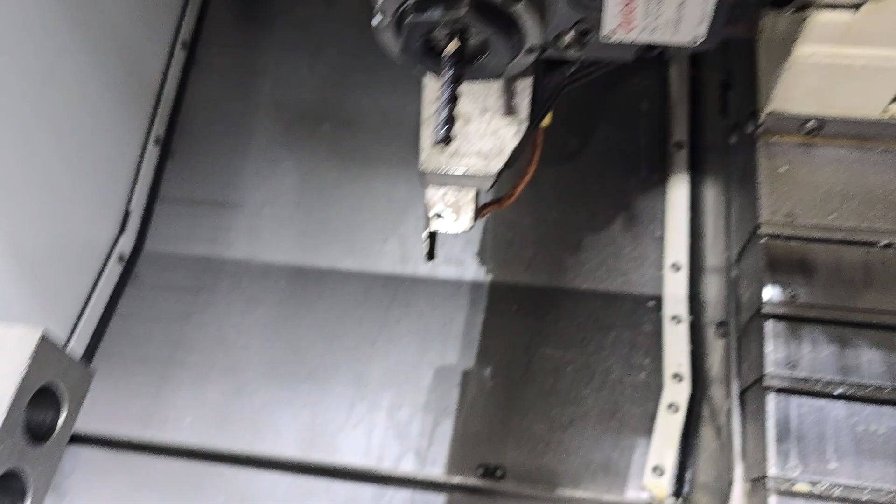You need a Y-axis for that, because what's going to happen is we're going to have that end mill go on a Y to the top, and I'll show you because I'm going to machine one part with you, and it's going to do like a radius line, and it's going to come up.

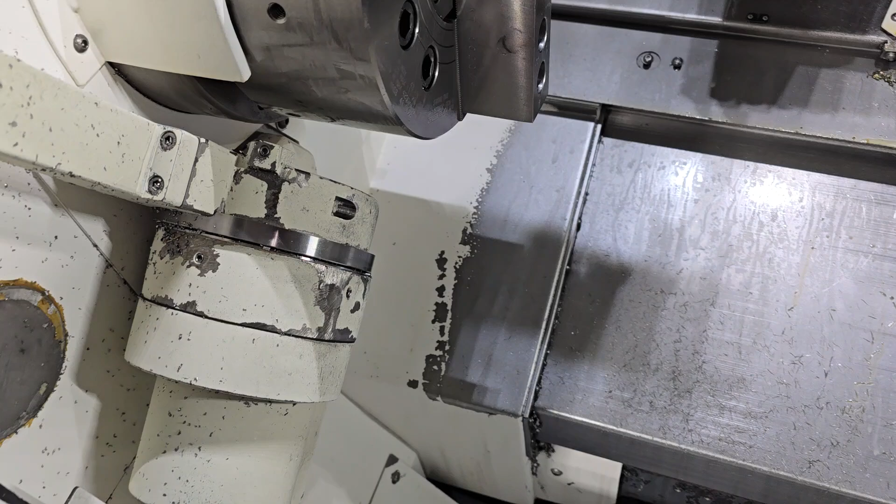So I did a test piece, and this is what we're doing. It's just very small flats with the radiuses at the end, as you see. Just to kind of show you what we need.

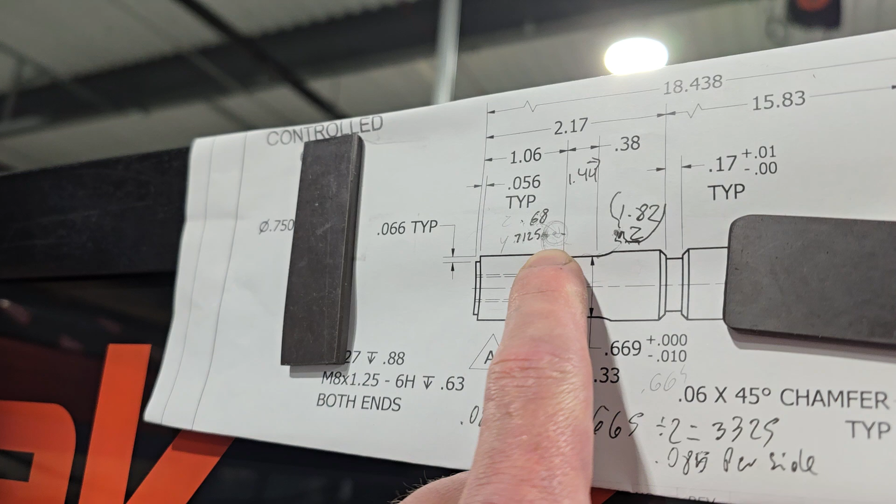So you need a starting point. What we have is, as you see, 1.06 here. The flat is 380. And then we know that these radiuses are 380. That's really all the information you need.

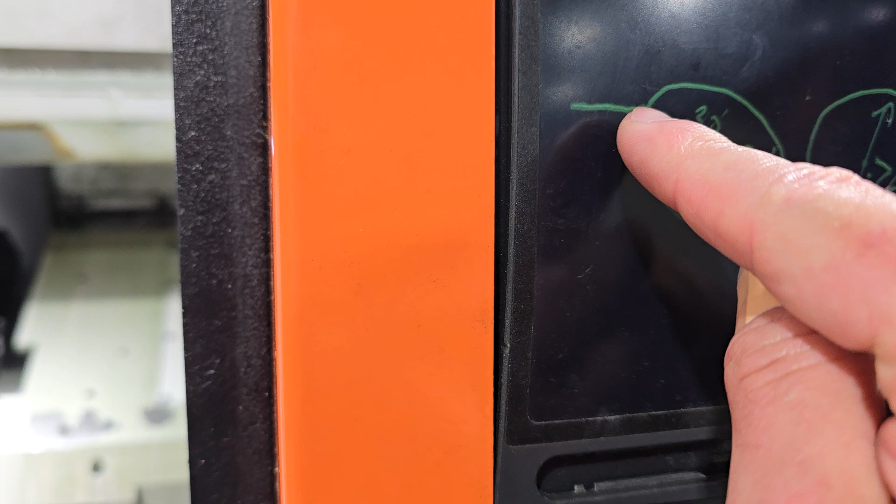The way you're going to machine it is you're going to start like do a radius, and listen, the material is actually here, so it's going to go up because I don't know this radius. I can calculate the full radius though.

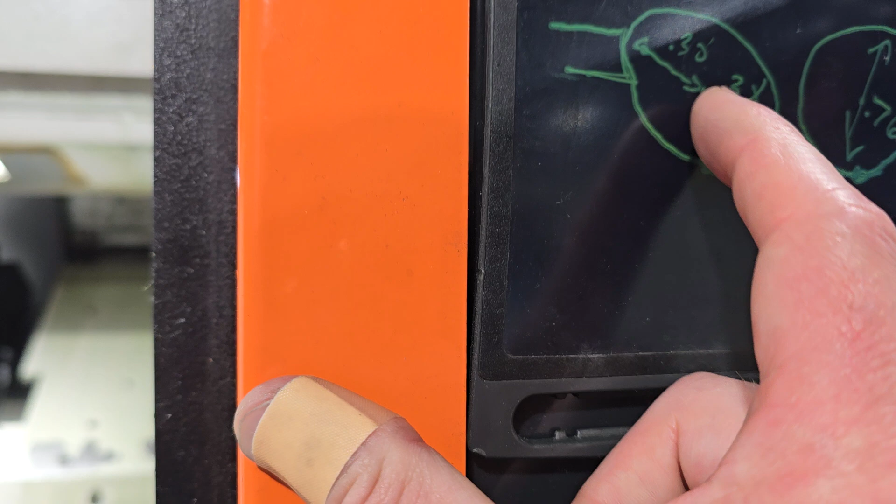Because all you got to do is go whatever the bottom is plus 380, because we know that radius is 380, and we can go from a center, but because we're only covering about half that radius, I don't know what's the starting Z point of that radius. So I'm going the full one, so it's just going to cut air before it cuts into the material.

So let me explain maybe here. As you see, I kind of drew a radius a little bit. So imagine this is a whole radius.

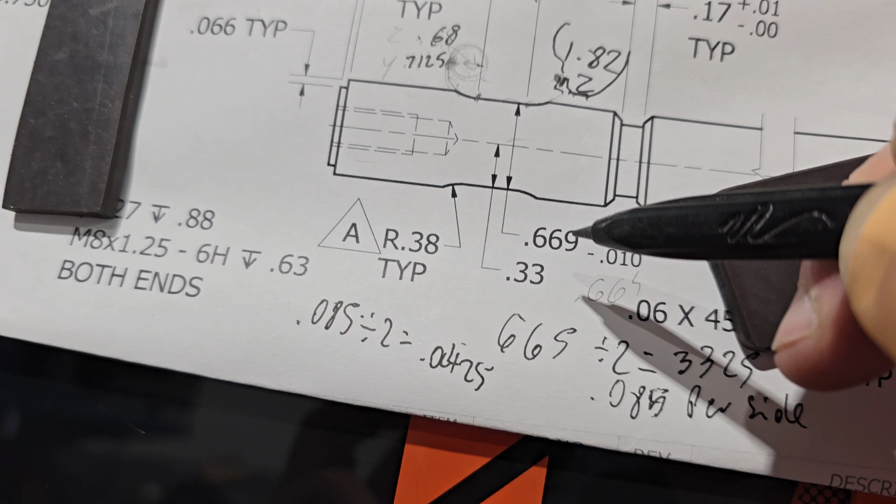I don't know what this is, but I know what that's going to be, because all you got to do is we have 669, so minus 10, so we do 665. 665 divided by 2 is 300... it's 0.3325. That's going to be from here to here.

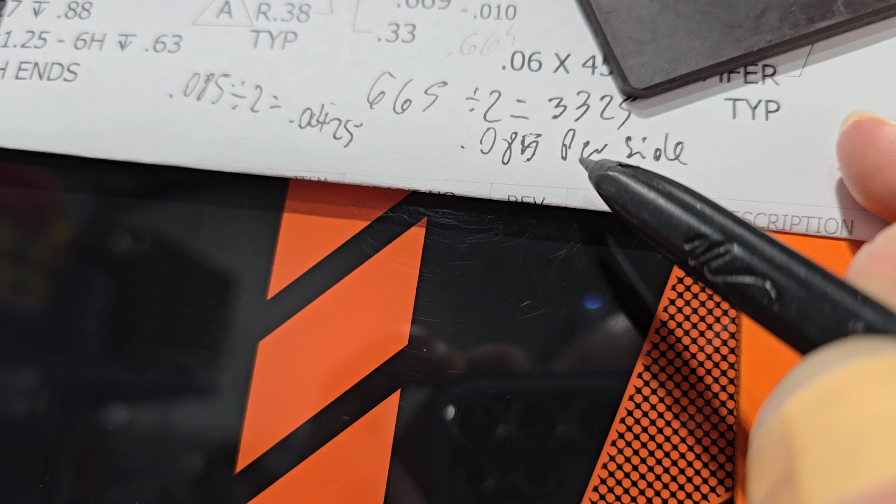Okay, and then we're moving 85 thou per side. Well, actually the whole thing, but you divide it by 2, so we're moving 42 and a half thou from here. So all you got to do, since the radius is 380, add 380 from here to here, and from here to here, and that's going to be the center of your radius.

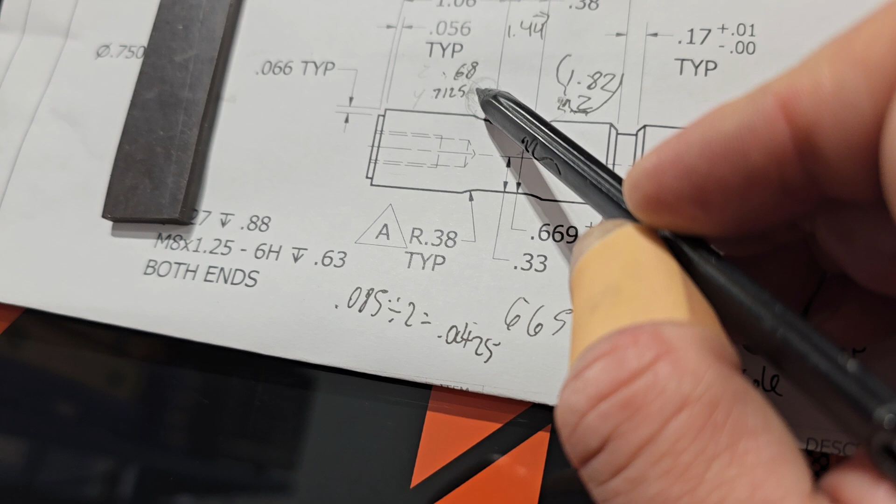Okay, so you literally go from the center, not the whole sphere, just the center. You go in here, here, then the line ends here. And then we're doing counterclockwise again over here.

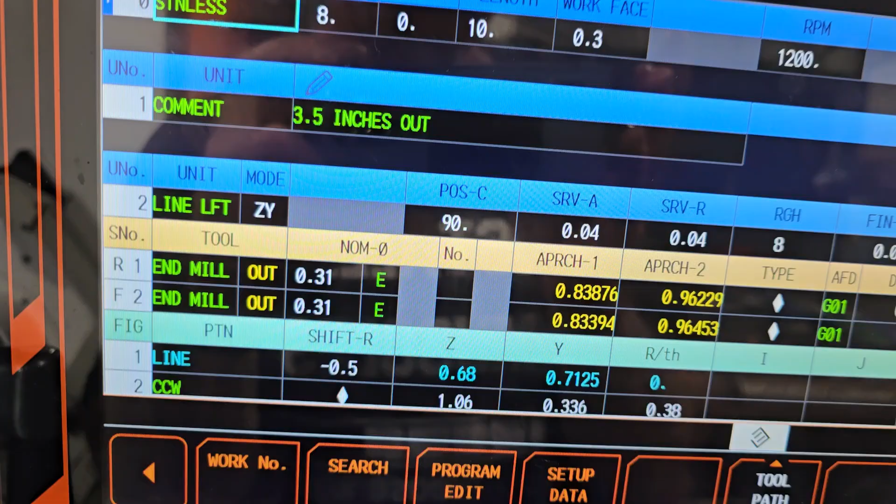Let me show you the program. So we're using line left, Z and Y. That means the machine is going to be cutting on a Z, and it's going up on a Y. You can go up on a Y, or you can go down on a Y. So we're doing Z and Y, position C.

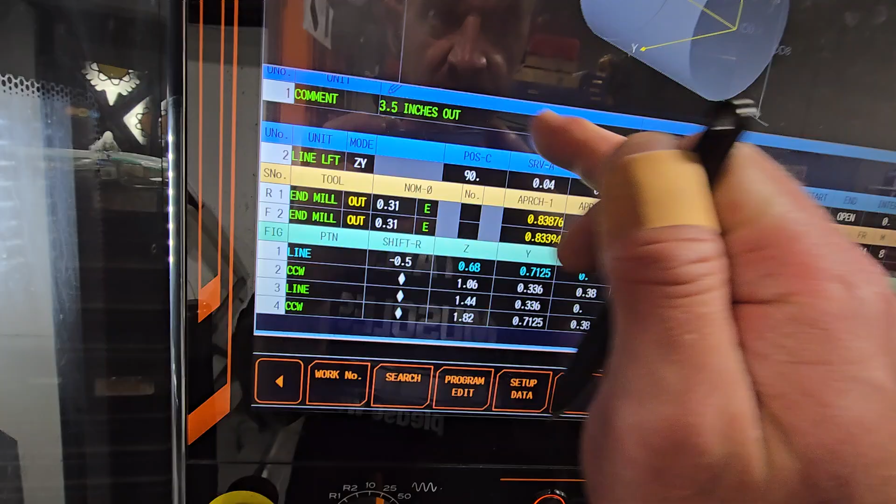The reason instead of 0 and 180, I have 90 and 270 is because if you do 0 and go to toolpath, the machine is going to show you this position. If you do 90, 270, it flips it, and you can see the bottom and the top, right?

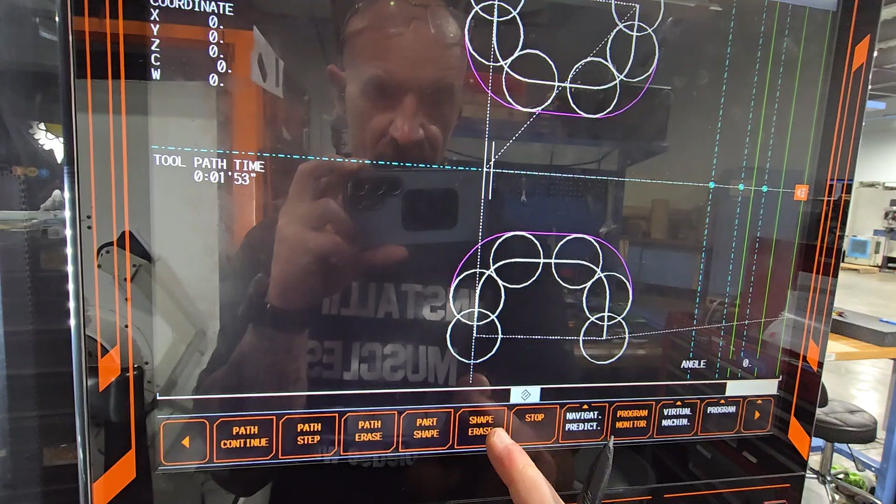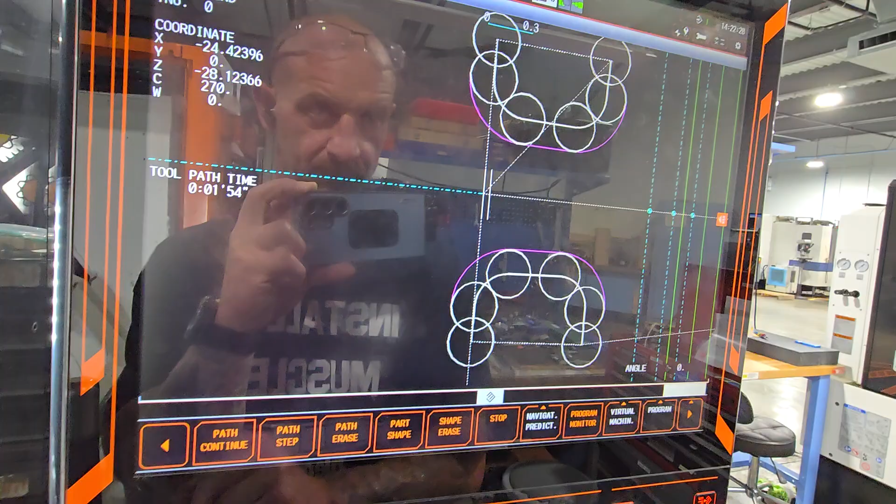So you do path erase, shape erase, you do part, and you'll see both of these. Then you can do the path continue, and you see the behavior of the machine. So that's why I changed this to 90, so I can see it better. Same thing as when you press this one.

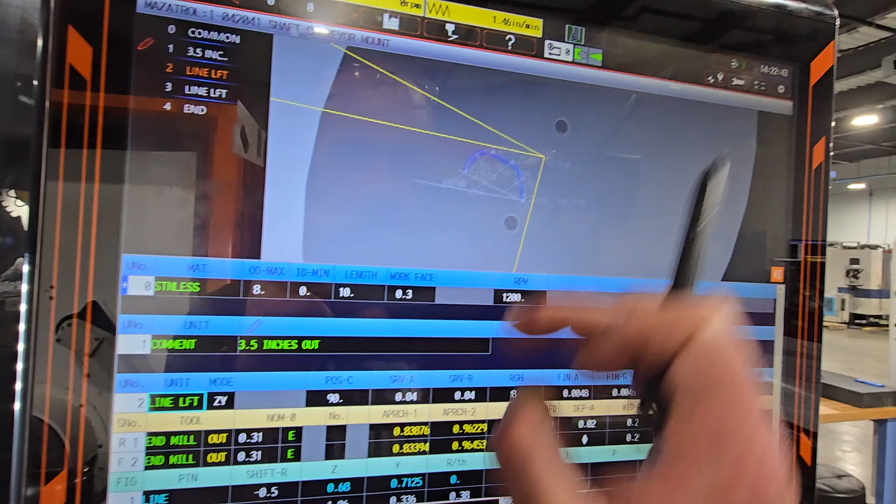Let me see if it's going to show you here. See, it shows you even on here the shape, so we know we have a correct shape. Anyway, so that's why I got the position 90 here.

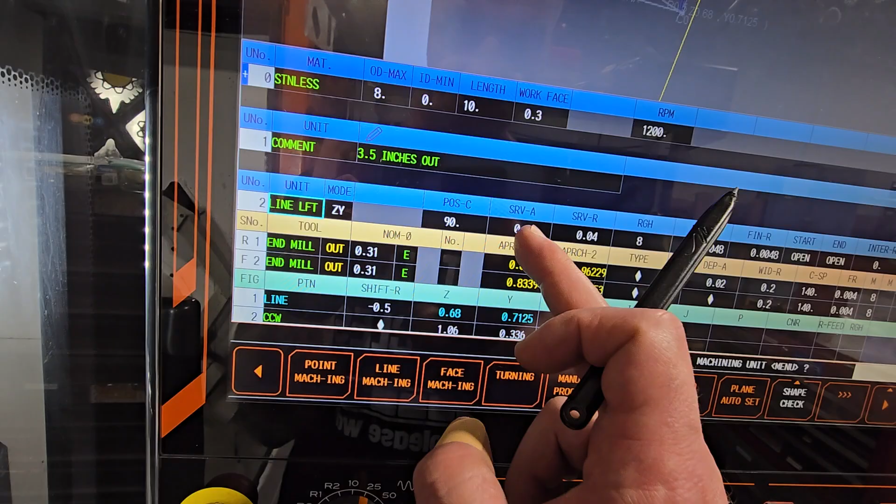We're moving 40 thou from A, so that's going to be the depth. This is going to be A, and R is going to be the depth over here.

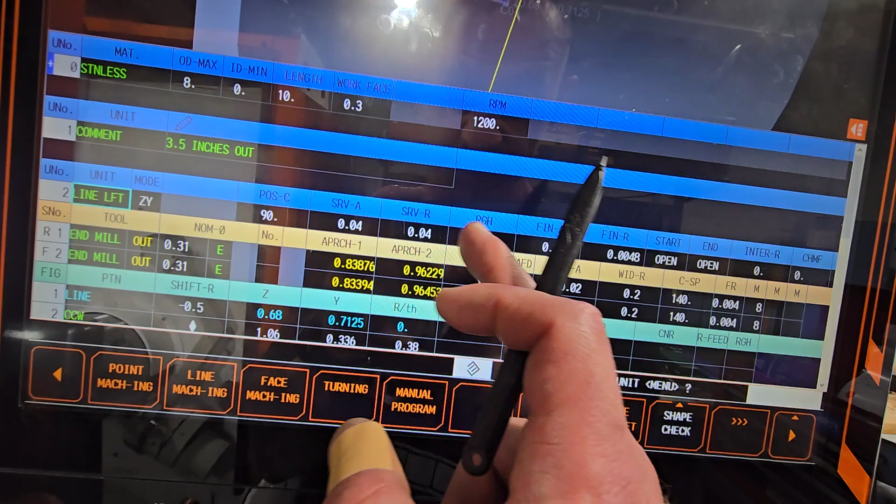My finishes are gonna be, I put a roughing as 8, so 0048, 0048, start and end open, inter-R and chamfer zeros. These are all automatically populated. I put 20 thou depth of cut. You can do way more, I was just playing with it. Width of the cut is 200, and I'm using a 312 end mill. So let's start.

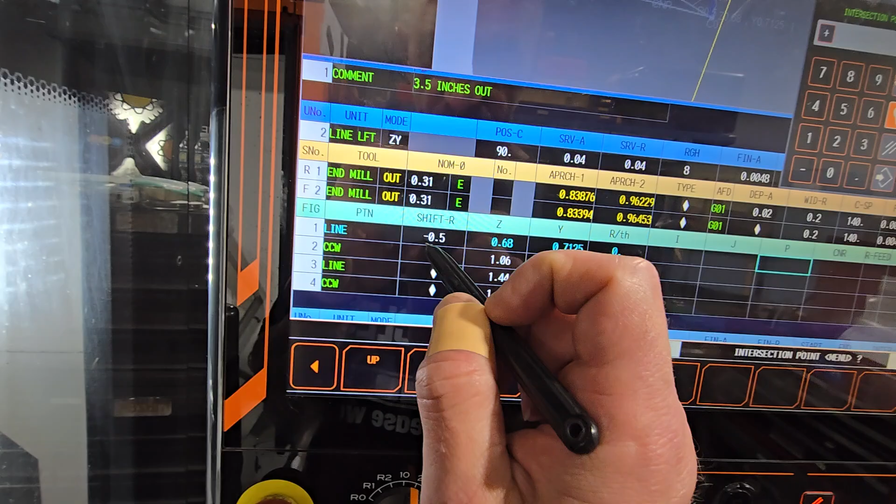So first, we have a line and 0.5 R. That's how deep it's gonna go. Okay, so...

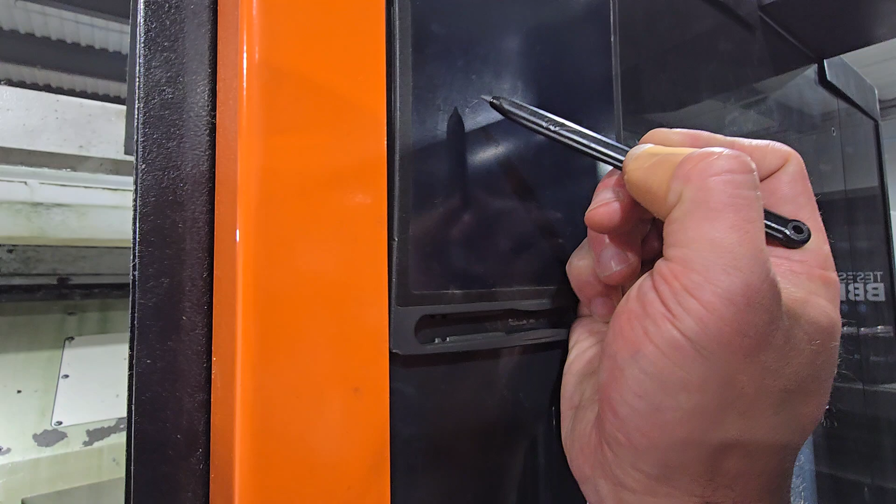Let's draw the part. All right, so this is the part, but we know these are the radiuses. So now just imagine we get rid of this because, right, this is not gonna draw.

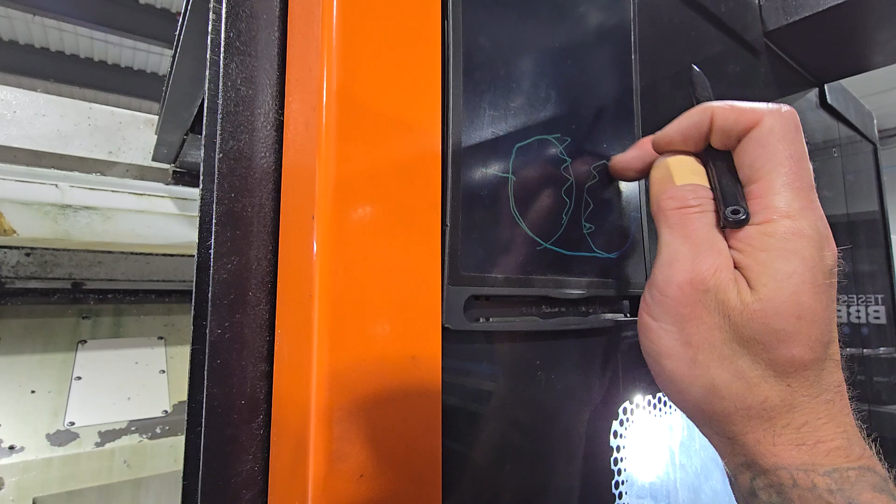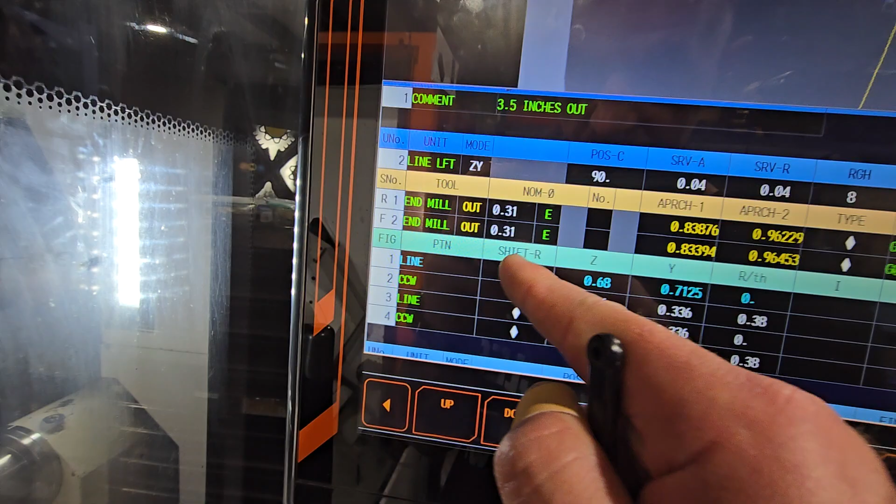So we are starting here. This is gonna be our line. And just so you remember, when you do your line, which is your first one, it's your starting point, the shift R means the tool is gonna go half an inch minus. So the R, 0, is the center of the part.

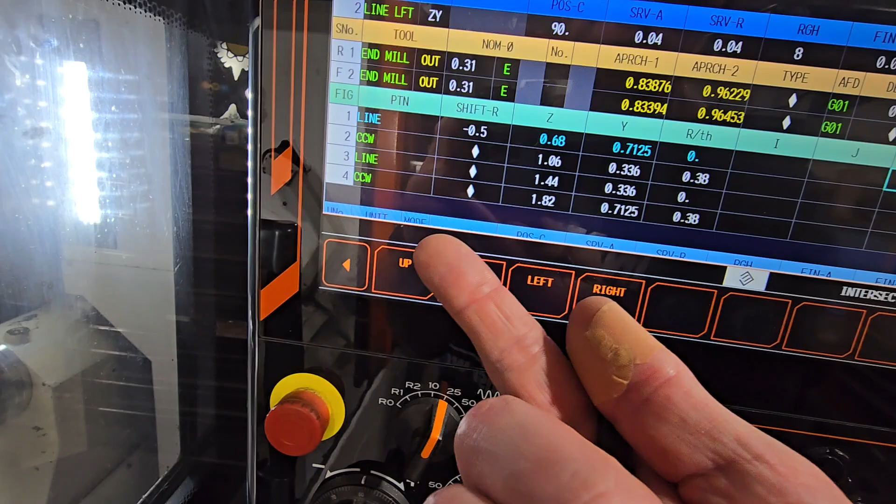I'm going another 500 deeper, right? So it passes the part. That's why, so R, in line left, X, Y and Z, or Z and Y, it's technically how deep you're gonna go, that's your R. So -.5 on R, that's like literally 1 inch deep. Since it's a 3/4 part, it's gonna go 250 thou past the part.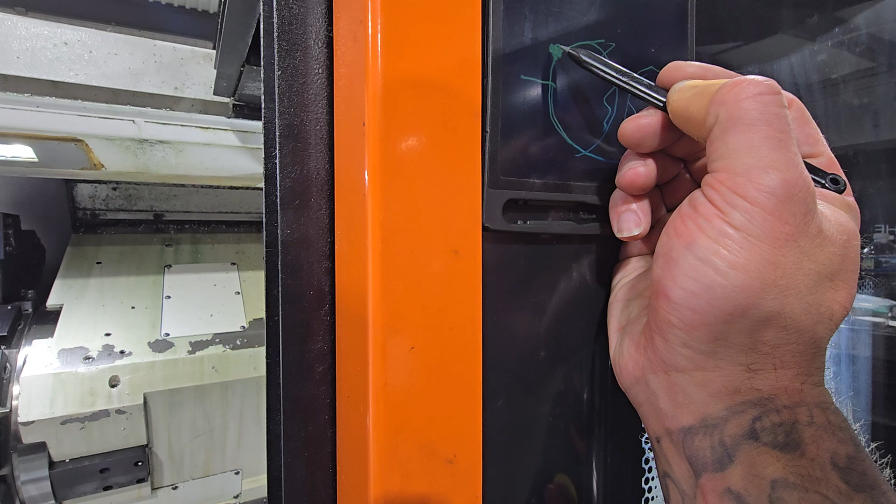Starting position is 0.680. So this is 0.680 on Z, and Y, since Y is gonna be our X, right? Because we're milling, it's gonna be 712.5. And how did I come out with this number? Because I added, like I said, half plus 380, and that's how I got the center of the height of this one.

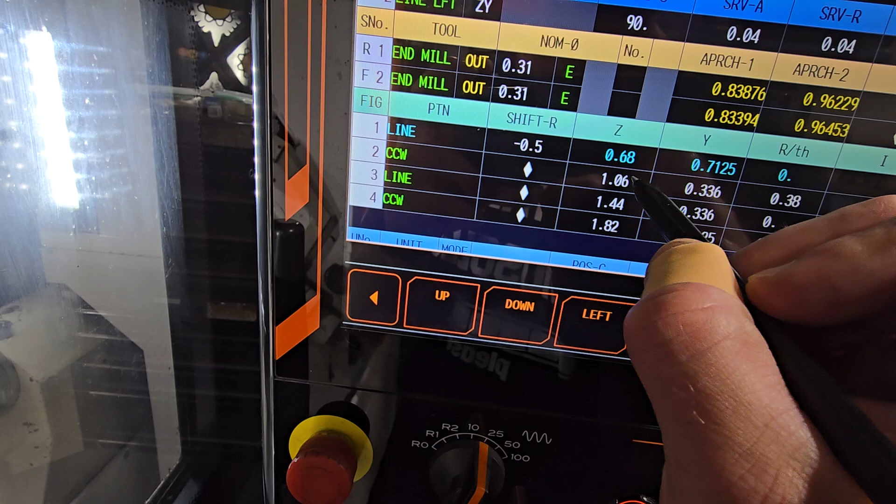So this is my line, okay? And then I see counterclockwise, we're going to 106 and 336. Okay, so that means this is the counterclockwise move, and we're going to the flat over here. So as you see, counterclockwise, we're going to that flat right here, which is at 106, and 669 minus 10 divided by 2.

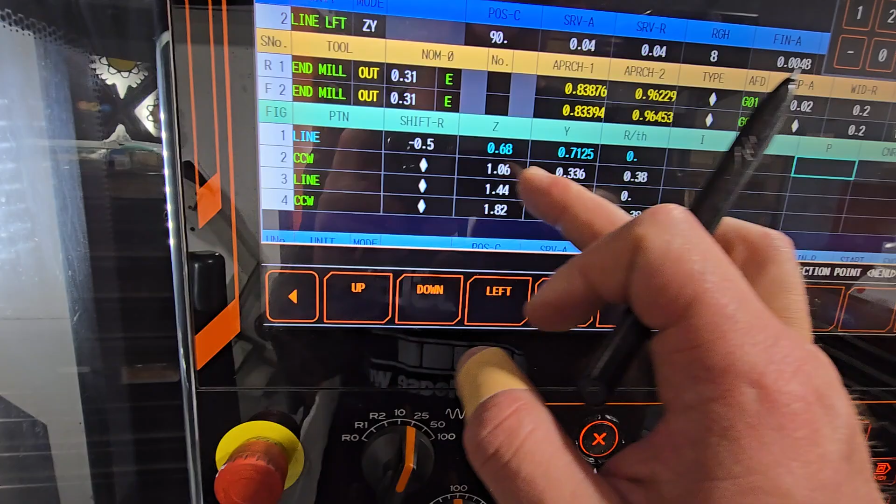I've erased it a little bit because I fell a little bit under the size, and then this one I added 380, right? So it's going to be that radius. Then we have that straight line.

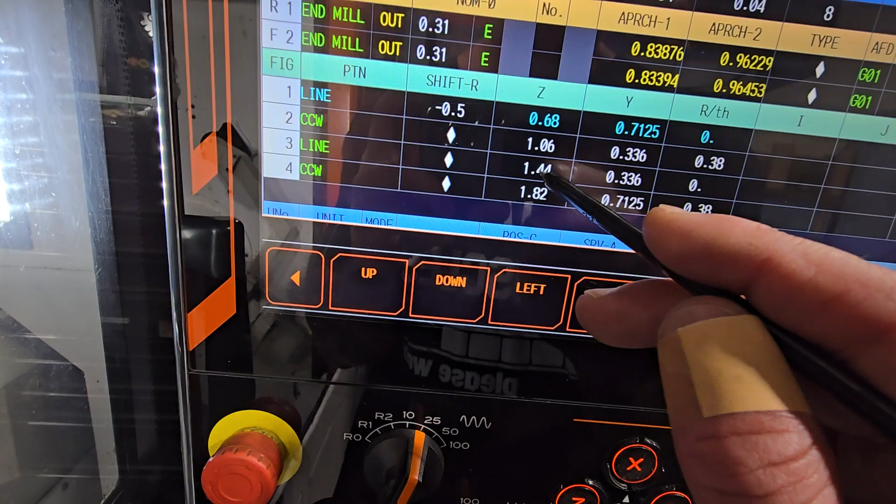So we're staying, we're going to 1 inch 440, same Y, and obviously it's a line, so no radius, right? So this is that line here, and then we're going to come out with a counterclockwise here.

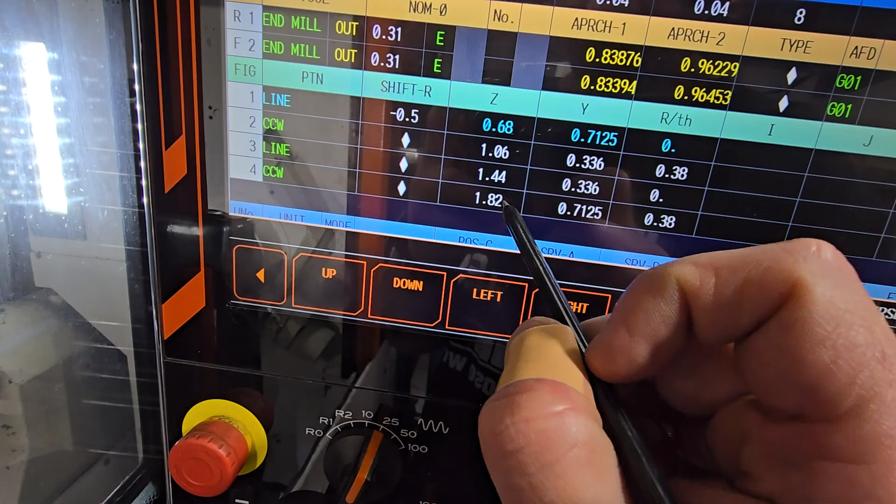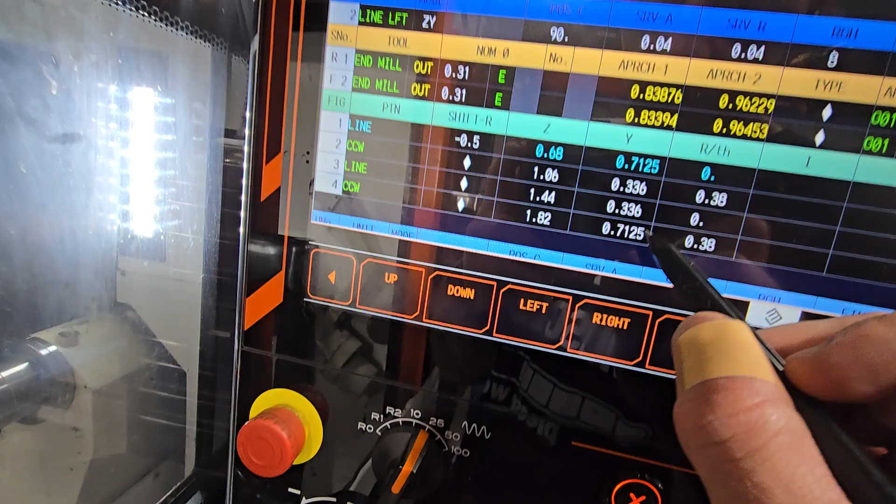So as you see, 182. How did I get the 182? Because I got 106 plus the flat of 380 is 144, and I added another 380 to my length, and this is how I got my final point Z, and of course 712.5, how we originally started.

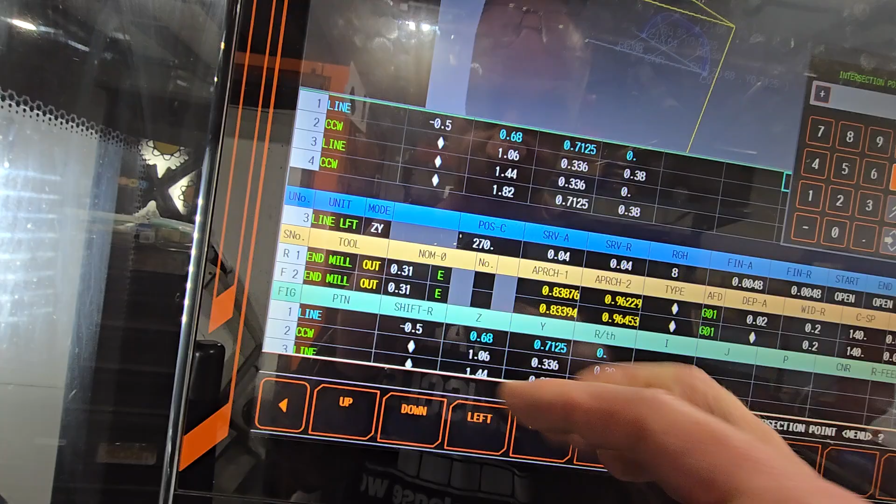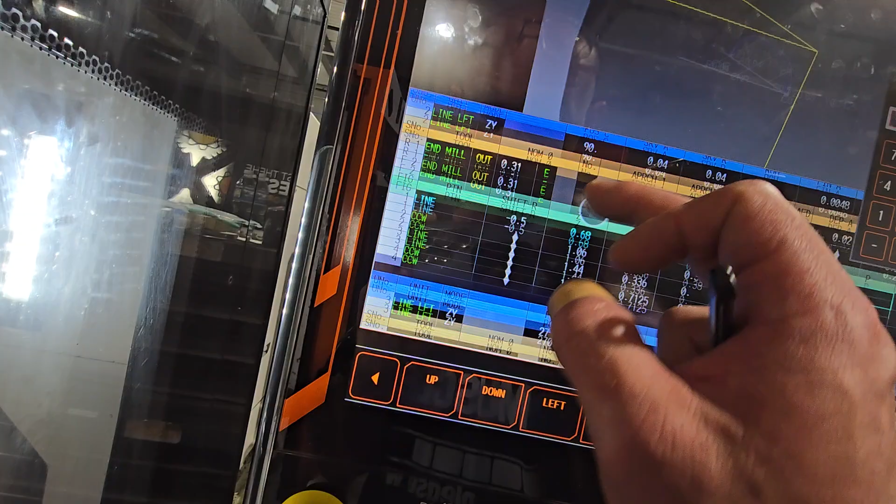So this is my position 90, and then you add 180, so you have another flat across, and now you're at 270. So you're technically, I went unit copy, I copy number 2. Let me see, copy number 2, and all I did was change the position C.

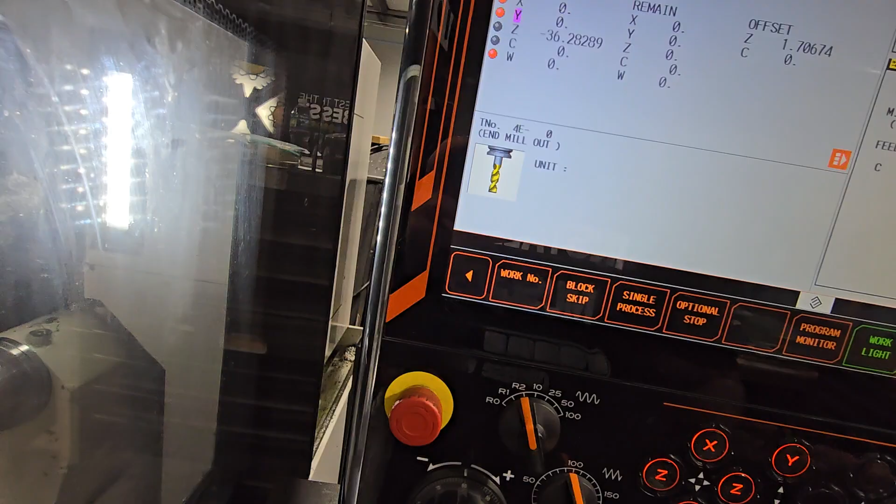Okay, so I'm gonna run it with my glasses on, coolant off. This is gonna be my first part. I only did a testing part before. Of course, make sure first part goes slower, make sure everything clears. As you see.

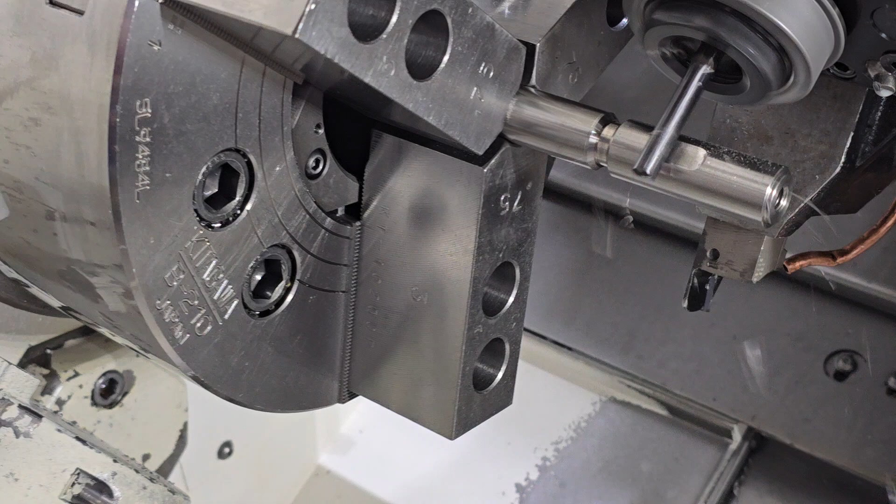Okay, so you can technically put in a half an inch end mill and do it with one pass, but this is what I had on the machine, and I was doing this program kind of in a hurry. Okay, so these are two roughers.

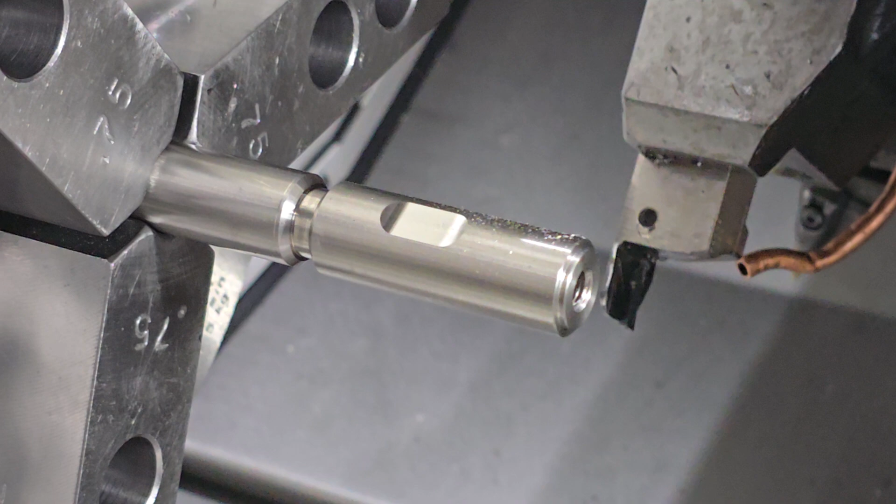So you guys see the profile. See, so it's cutting that radius up in the air. Cutting that radius still. Now just finish the R, and it's gonna finish the radius, and it's gonna clear up.

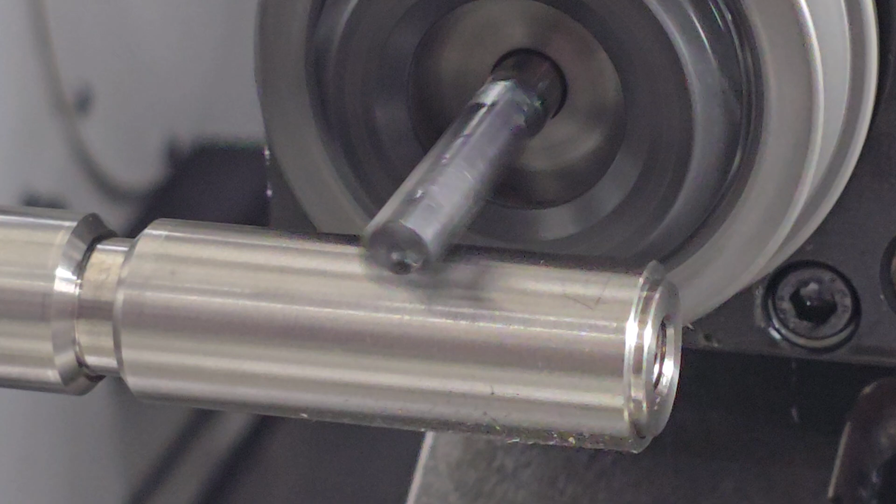Okay, I'm back. Rotation. Let's see. Oopsie.

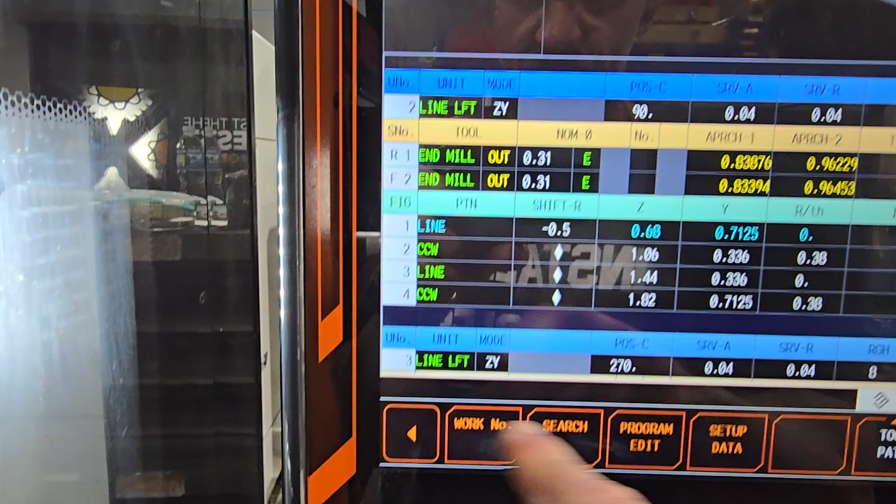If you have a small flat like that, like I said, you can only do one, you technically have to do one pass. You can go just to the program, go to R, for example, which is the rougher. You can go erase, and you can erase the rougher, and all it's gonna do is just do a finishing pass. Like I said, with a half an inch end mill, this is not gonna be a problem.